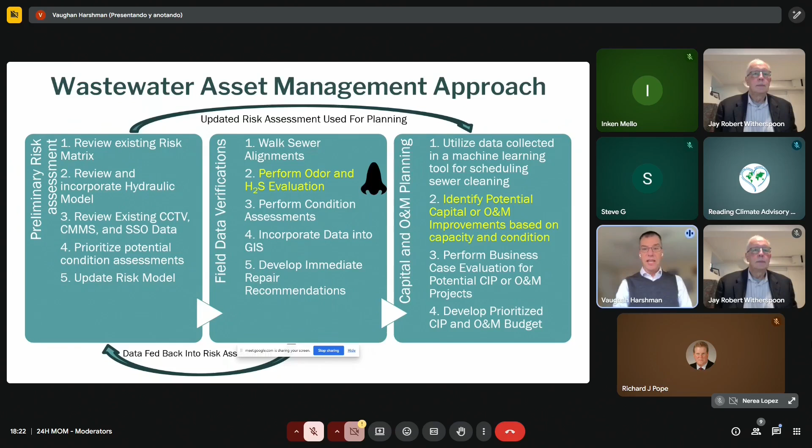And so then you go into doing field data verifications and O&M planning. But as you get deeper into that, we start performing odor and H2S evaluations, and then identifying improvements based on the capacity and condition. And one of the things that I believe is important is that instead of investigating odor and H2S as a result of a condition assessment, odor and H2S can drive the priorities for that condition assessment.

So this has been discussed in a few presentations already. I'll touch on it briefly again: H2S, in addition to having the rotten egg odor that gives us our odor complaints, does cause corrosion in our systems, through the conversion of H2S to sulfuric acid, typically in damp, moist locations where atmospheric H2S and atmospheric oxygen both get dissolved into an aqueous phase where the thiobacillus bacteria can grow, thrive, form the sulfuric acid and cause corrosion, particularly of metallic and concrete structures.

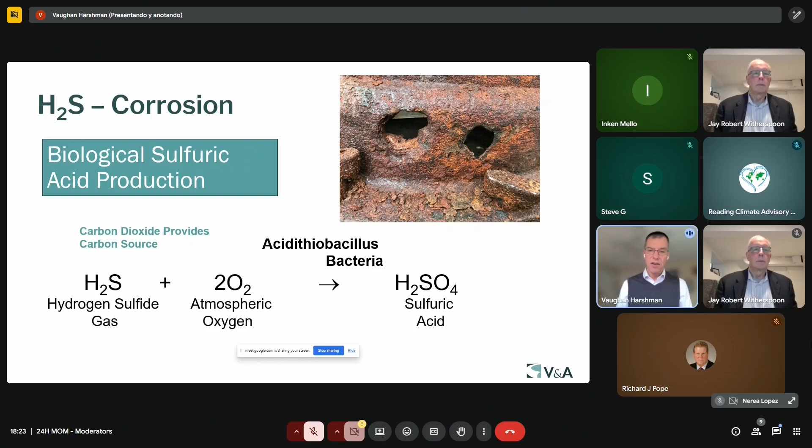So in our systems, odors are what get attention. People call and they complain about odors. They're adversely affected by odors, and it affects their quality of life. And they let utility operators know when there's a problem. The pipes, the lift stations, the other assets don't pick up the phone and say, "Hey, I'm corroding down here." But the folks who are telling us that they're affected by odor can give us an idea of where to look and where to do more detailed condition assessment activities.

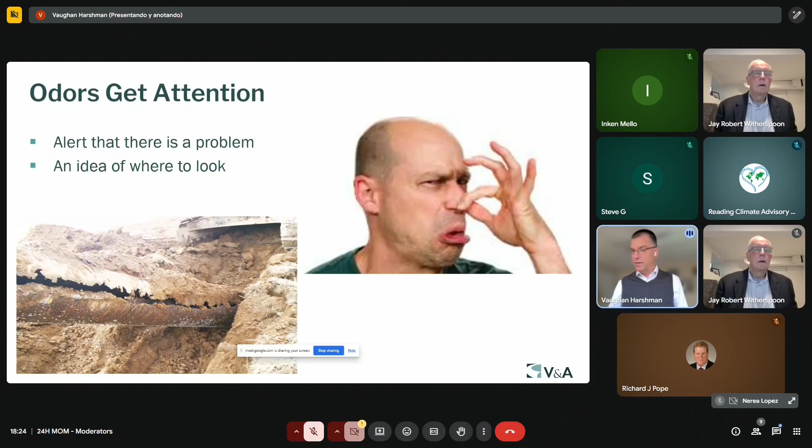So really, what we're talking about here is a holistic approach, whether the condition assessment reveals H2S corroded assets or whether odor issues indicate that we might have those corroded assets. They really overlap, and the H2S affects both the condition of the assets and the odors. So it's important to perform sulfide assessments, which have been the topic of many presentations in the last 18 hours, to not only identify where there might be odor issues, but where the sulfide may be of corrosive levels as well.

That can be accomplished through modeling. Steve just mentioned the WATS model, using that to predict sulfide formation and transformations, and also ventilation. Those types of models can be used to predict the sulfide conditions, but we can also characterize those conditions through actual field analysis, whether through grab or continuous monitoring for atmospheric hydrogen sulfide, by looking at differential pressure to understand ventilation and air movements in sewers and other head spaces, or through liquid phase sampling of dissolved sulfide to understand sulfide formation and movement through the sewer system.

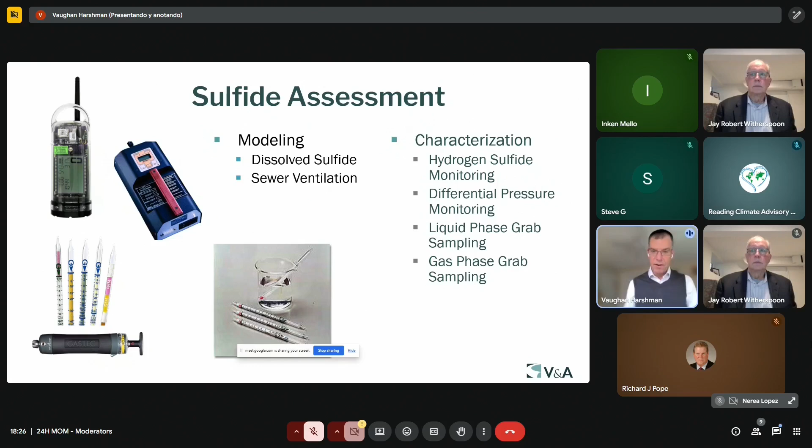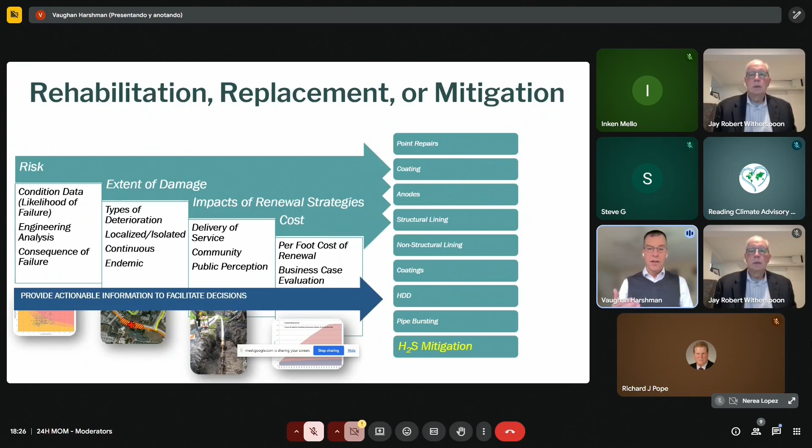All this can inform an asset rehabilitation, replacement, or mitigation strategy. There's a lot on the slide. I'm not going to go through every piece, but in the lower right, one of the results of these types of investigations and condition assessments is potentially doing H2S mitigation, mitigating those impacts in the system, not only to protect from odor, but to protect the systems from corrosion as well.

So if we're going to look at doing sulfide mitigation, we have to understand what we can influence. And I like to think of this as a four-piece puzzle. Really, there are four things that impact the presence and the magnitude of an atmospheric hydrogen sulfide problem in our systems. And the first is dissolved sulfide. And if you don't have dissolved sulfide, the other three don't really matter because the sulfide is not there.

But assuming that there is dissolved sulfide, then the pH of the wastewater, temperature, both of the wastewater and the surrounding environment, and the turbulence or agitation of the wastewater all come into play. And so we think about how can we influence those pieces of the puzzle.

And so we can influence dissolved sulfide through system design and operation, through cleaning of sewers to reduce the amount of debris that is providing an environment for the growth of sulfate-reducing bacteria, and through chemical addition to either prevent sulfide formation, or oxidize or otherwise remove sulfide that's already existing.

With pH, we can look at what some contributors to pH may be in our systems through industrial pretreatment, and then also use chemicals to adjust the pH as well. Ulrich talked about using mag hydroxide for pH adjustment in his talk 2 or 3 presenters ago.

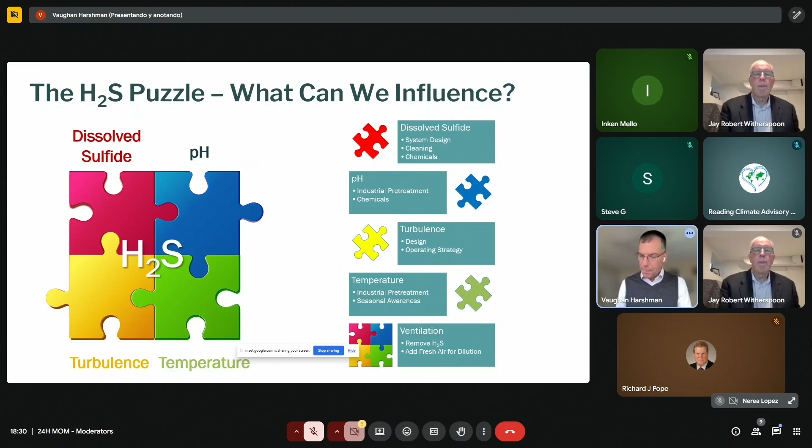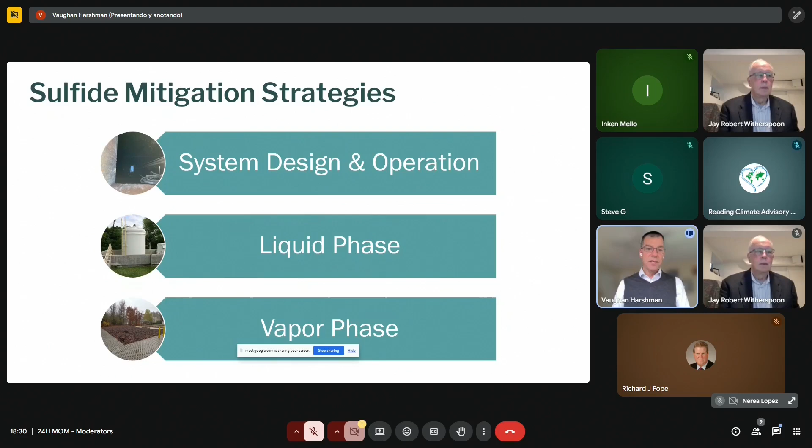But many times those strategies actually enhance the corrosion problem by causing H2S levels within the infrastructure to increase. And we actually not only don't help corrosion, but we make it worse. So as we look at these strategies, some involve system design and operation, some involve liquid phase technologies, some involve vapor phase applications as well. So I won't go into much detail on any of these, but just to hit a summary of some of the big topics here that are possible for addressing these issues.

One is to prevent sulfide formation, and to do that, one of the key things is to limit force mains when possible. I don't think we often put in pump stations and force mains just for fun and games. But there are times, particularly with developer type projects, where it might be easier to put in a pressure main than to do a gravity main and the additional excavation and work that would be required. But we need to look at the impacts of those force mains in terms of sulfide formation and impacts downstream, both odors and corrosion.

Minimizing detention time as much as possible, maximizing the opportunity for oxygen introduction to keep systems aerobic to prevent the septicity that leads to sulfide production, achieving scouring velocities in lines so that you keep lines as clean as possible and don't have debris accumulation that provides more environment for sulfate reducing bacteria growth, and also to consider sulfide in cleaning plans, not only for hydraulic reasons, but for sulfide production to keep debris out of systems, and to control industrial discharges. Temperature, BOD, high sulfate, all things that can contribute to sulfide formation, and to make sure that those are being controlled to the greatest extent possible.

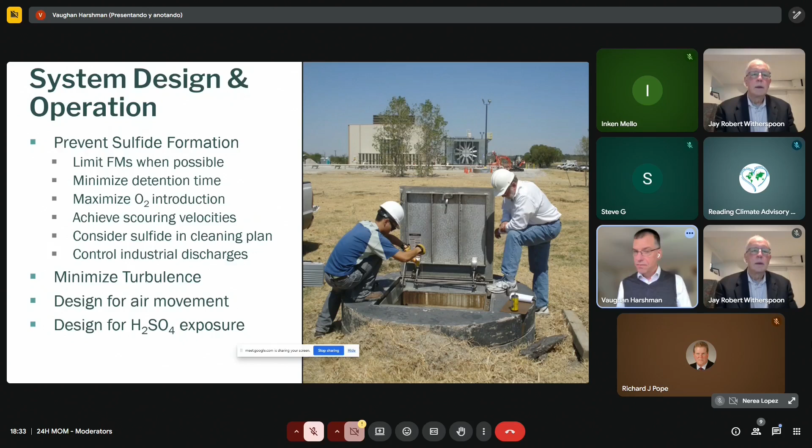Vaughan, you have a few more minutes, and there's one question. Okay, great.

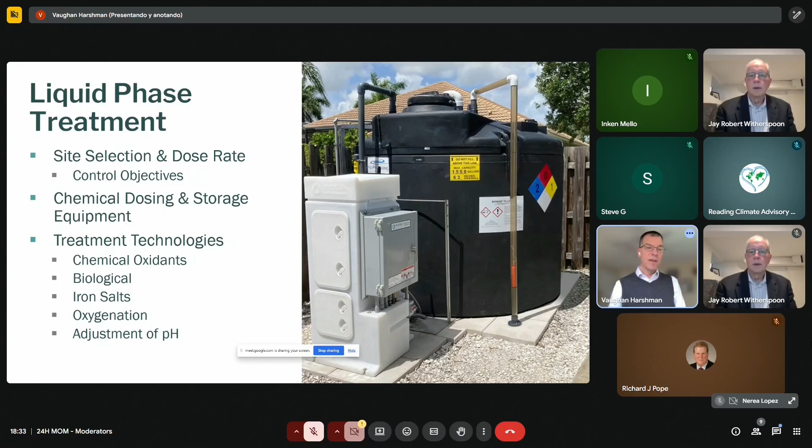I'll go really quickly then. Liquid phase treatment, a lot's already been talked about, I don't need to repeat it. Just site selection and dose rates are important. The dosing and storage equipment, of course, needs to be designed to accommodate liquid phase treatment. And then some of those treatment technologies are to use chemical oxidants, biological additives, iron salts, oxygenation to add oxygen, and adjustment of pH.

And then vapor phase treatment. Other speakers have talked about this as well. Pulling negative, maintaining vacuum on head spaces, but combining that with a strategy to make sure that you're lowering the concentration in that head space. And so you're achieving not only odor control, but corrosion control as well, whether it's through biological, chemical, or adsorptive type technologies.

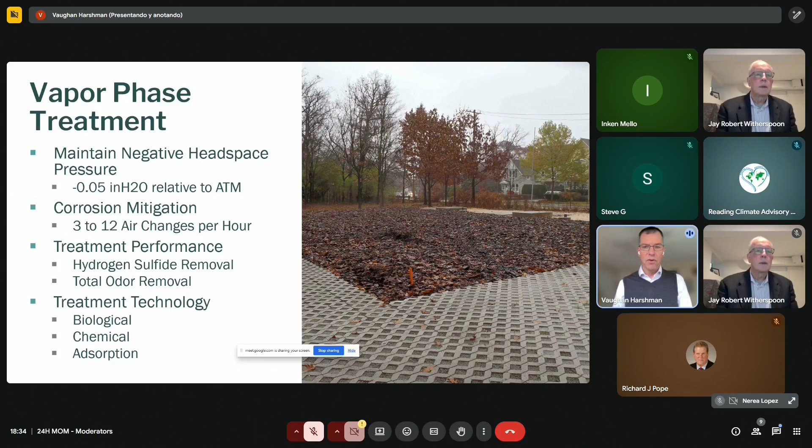So one utility's end results, this is my last slide, just looking at a utility that my firm has worked with. This particular utility had a years-long successful odor control strategy, but hadn't really addressed corrosion and started to observe some of the challenges that produced in terms of infrastructure failure. And they worked to shift their treatment strategy to encompass corrosion.

And so they moved from, hey, just keep the phone from ringing, to their goal to keep all of their head spaces at less than 20 ppm average H2S. That involved doing some upstream chemical dosing, some turbulence reduction, some vapor phase treatment, and some continuous H2S monitoring. They were able to reduce corrosion at some prime control points, particularly in lift station wet wells and gravity lines. They also recognized enhanced odor control as well as safety benefits.

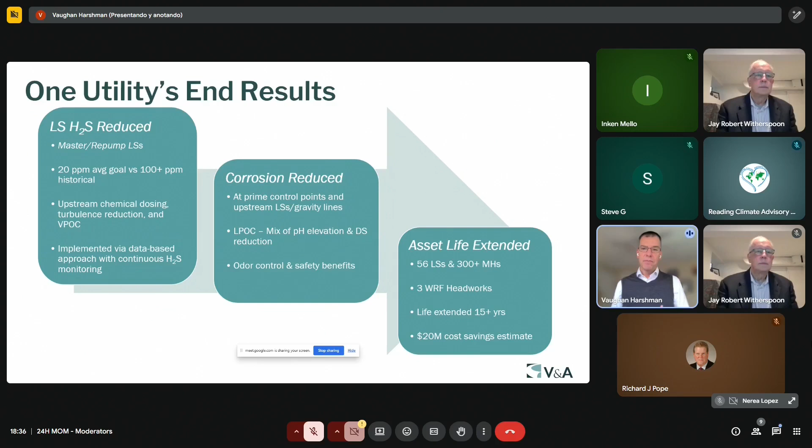And then they extended the asset life of some specific key points, a number of lift stations, more than 300 manholes, 3 headworks, and they documented that the extended life was over 15 years for those assets, and would save over $20 million, accounting for the cost of the odor and corrosion control program.

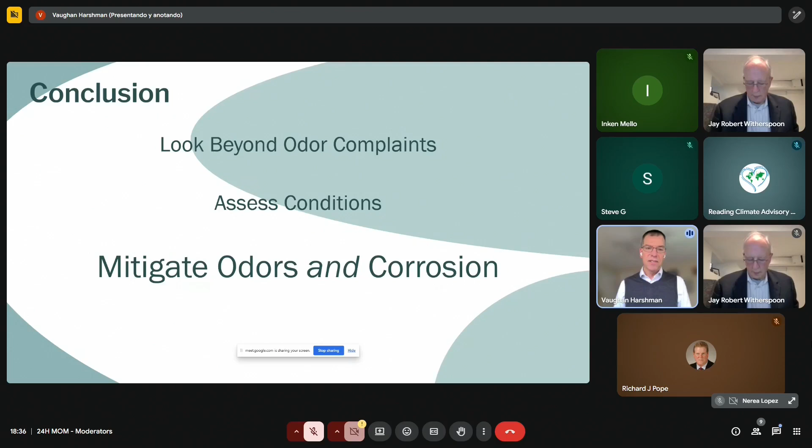So, in conclusion, I just want to say, look beyond odor complaints, or look at those odor complaints as an opportunity to do some condition assessment, and then implement strategies to mitigate odors and corrosion.